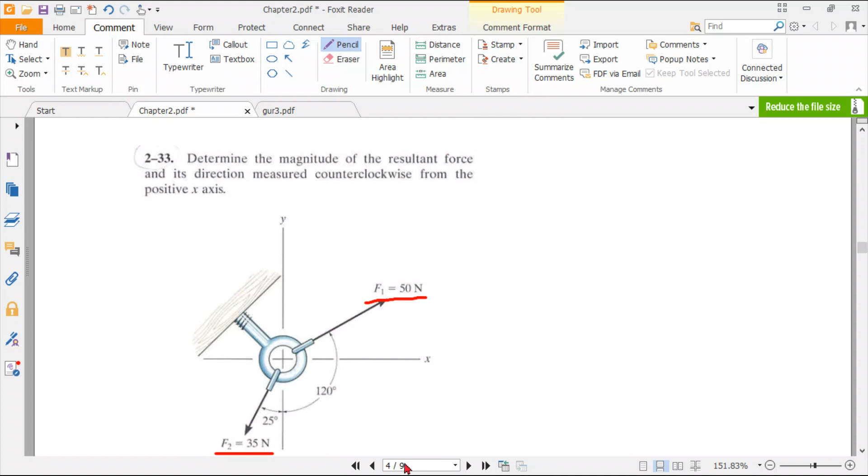We have F1 here, which is given as the magnitude is 50 newtons, and F2, the magnitude is 35 newtons. And the angle between F1 and F2 is given to us. It is given as 120 degrees. Okay, so let's see how we can solve the problem now.

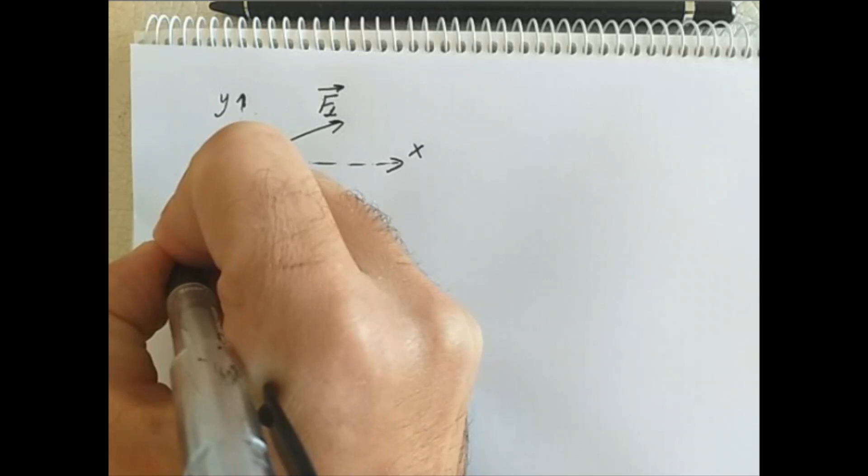Now, first thing is to draw the forces. Our axes are already given. So we have the x-axis as horizontal and y-axis as vertical axis. Now we are given two forces, F1, and there exists another force, F2. Of course, the angle between these two is given as 120 degrees.

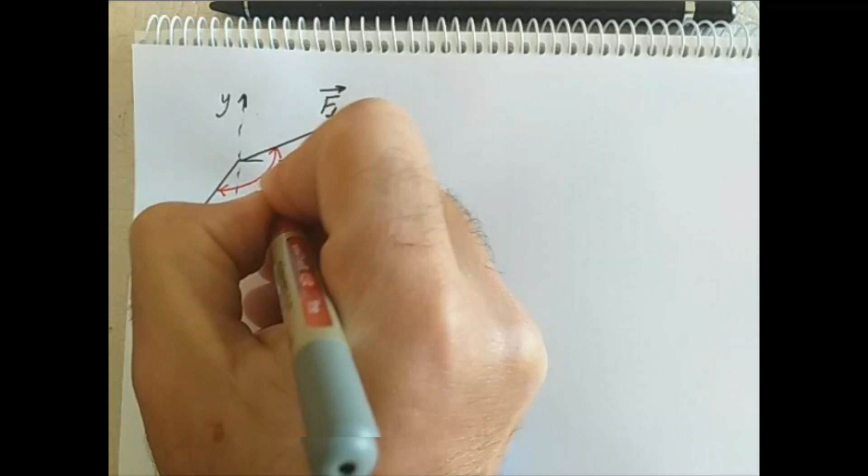Now we will find the components. First, let's write the x component of the forces. F1x is equal to 50 multiplied by this angle.

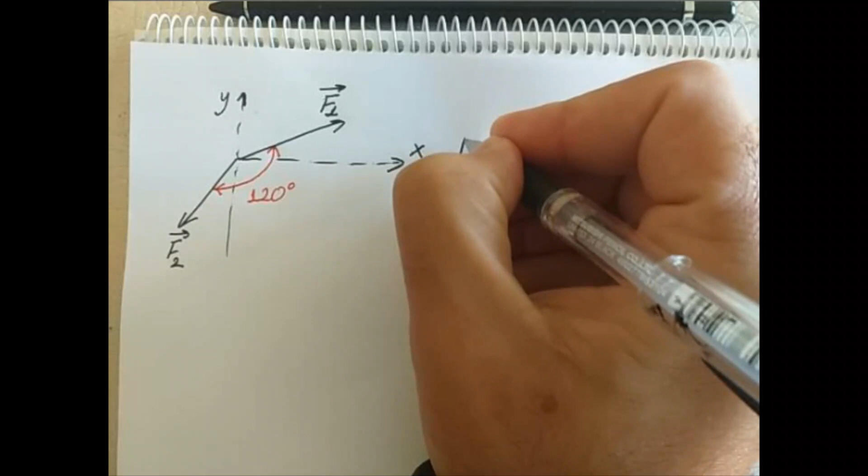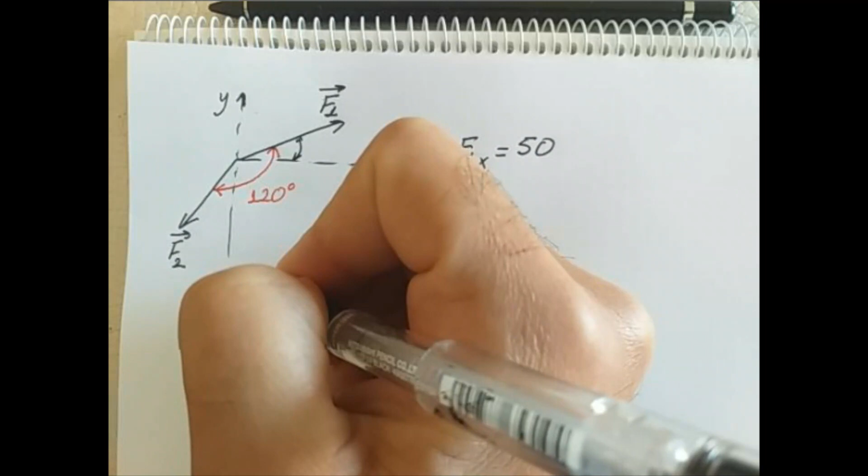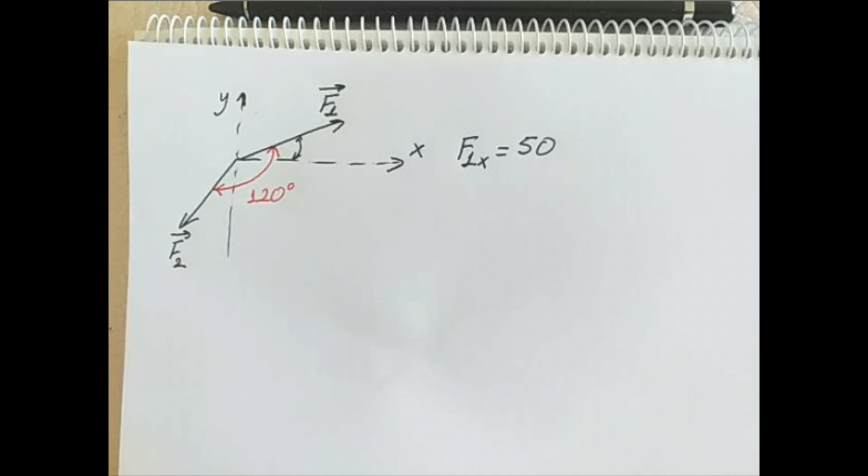Sorry for the moment. So this is just corrected. This angle is 120 and this angle is given as 25 degrees. So since this angle is 90 degrees, this angle is 30 degrees. This makes F1x 50 multiplied by cosine 30. From here we find 43.3 newtons.

Now let's find F1y. F1y is equal to 50 multiplied by sine 30, and it makes 25 newtons.

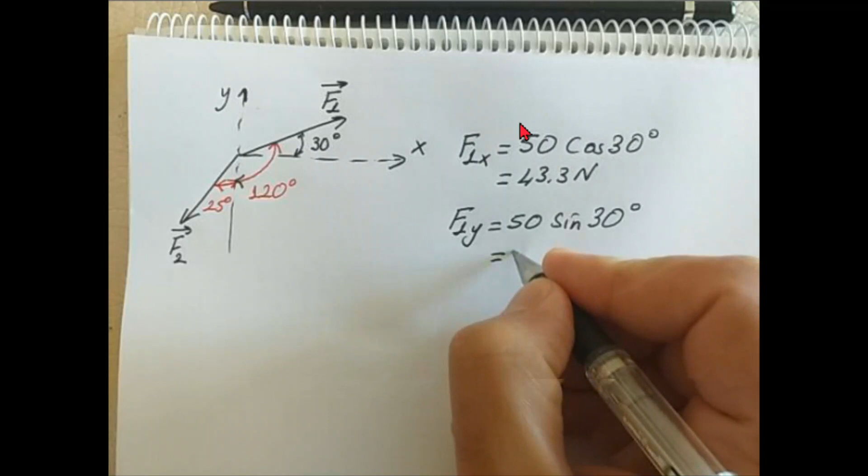Identically, we will find the x and y components of F2. Now F2x is equal to its magnitude, which is 35, but it's in the negative x direction, so minus 35 multiplied by sine 25, and this gives minus 14.8 newtons.

And F2y is equal to minus 35 multiplied by cosine 25, because it is also in the negative y direction. So the value that we get is minus 31.72 newtons.

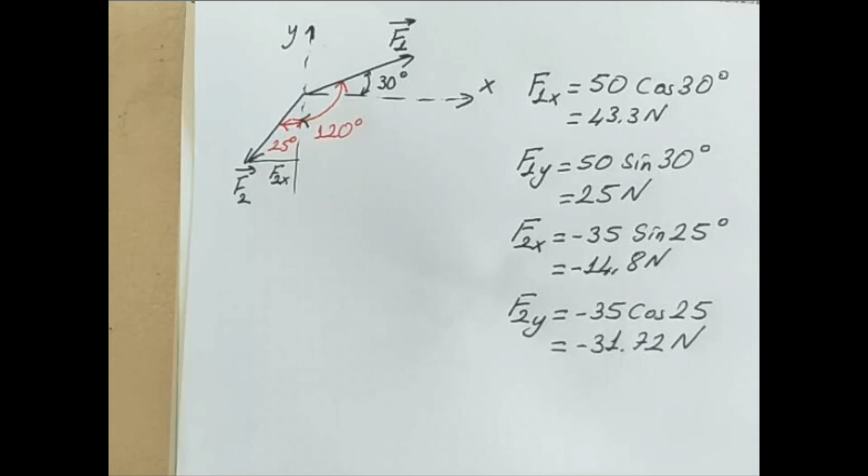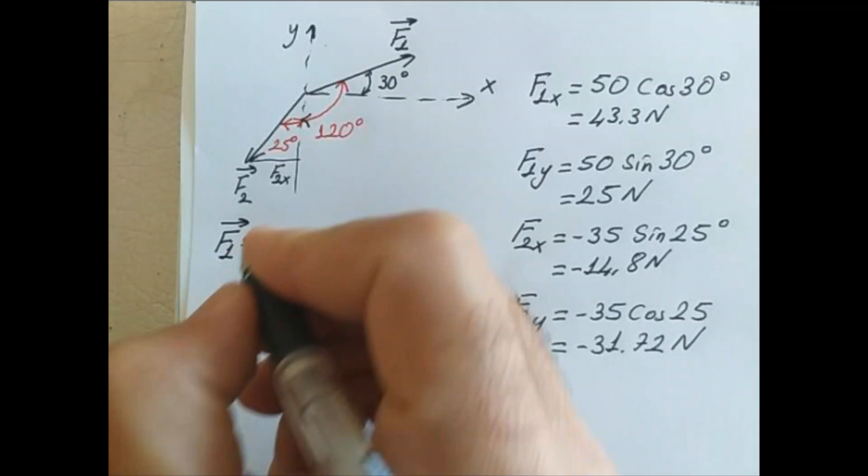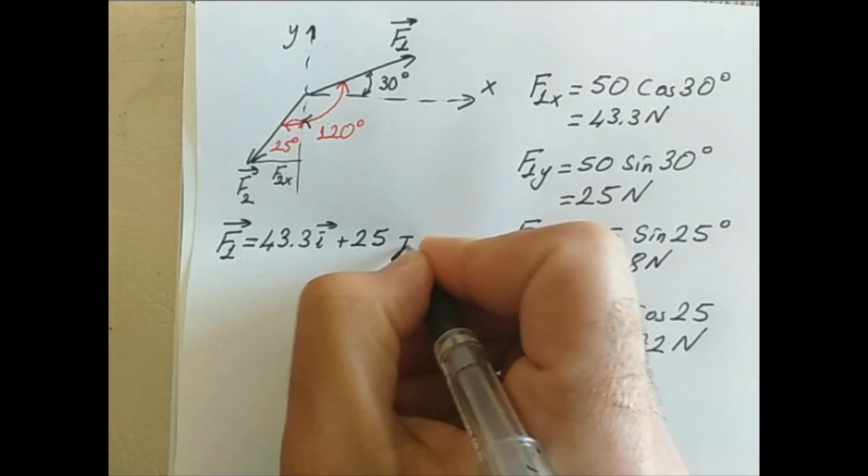Okay, now we can write the forces in Cartesian form. So F1 is equal to, by means of its components in x and y direction, 43.3 i plus 25 j, and F2 is equal to, sorry, let me write it again. F2 is equal to minus 14.8 i minus 31.72 j.

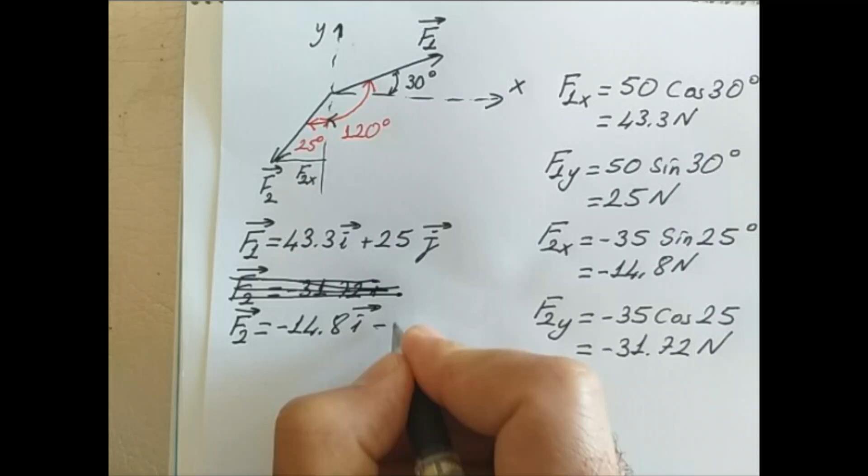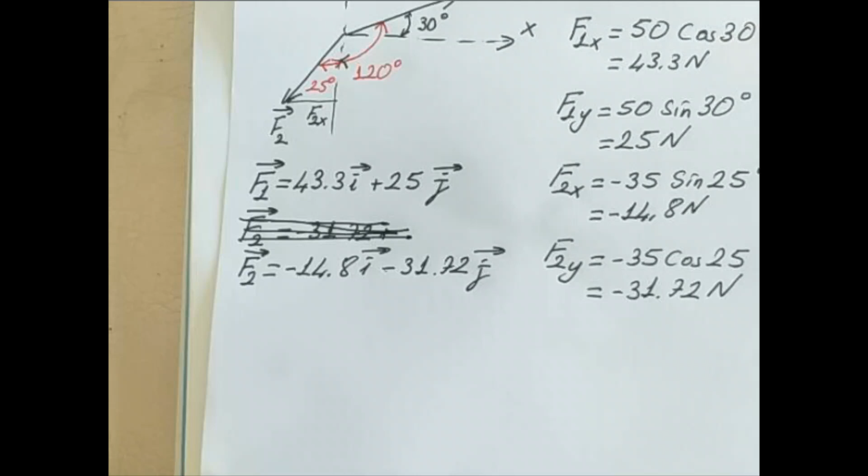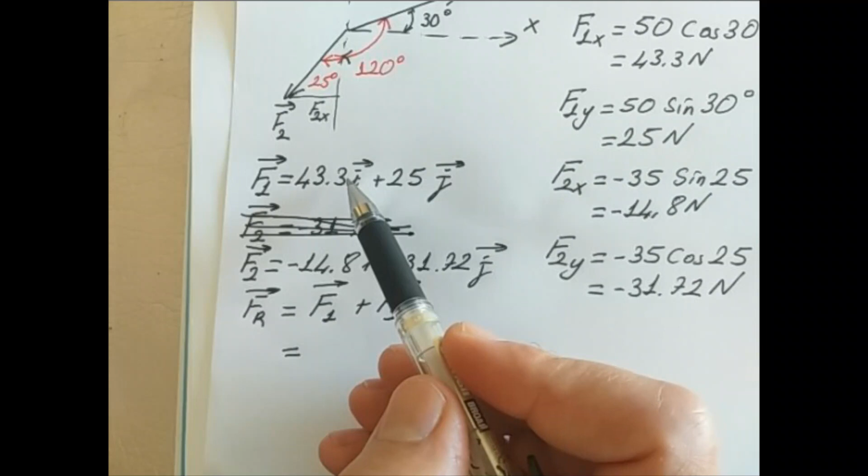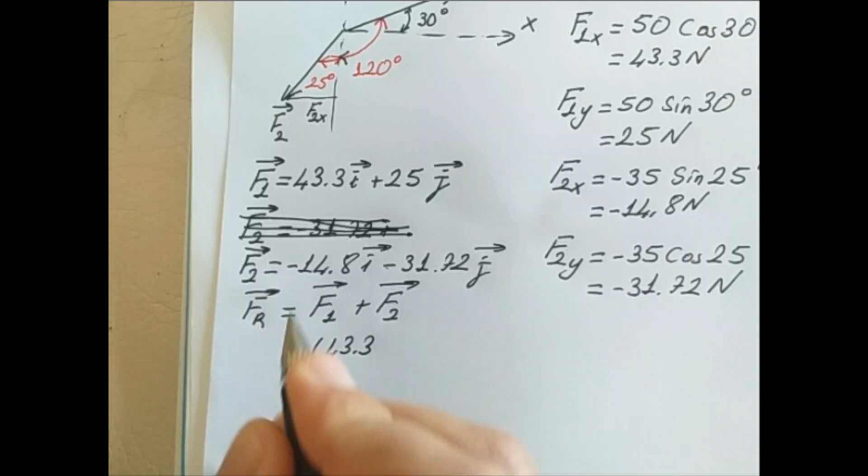Now the resultant force is equal to F1 plus F2. As a result, I will just sum up the x components first, so 43.3 minus 14.8 i, plus the y components, so 25 minus 31.72 j.

Now we can easily calculate the values. This gives us 28.5 i minus 6.72 j. So we have the x component of the resultant force and y component of the resultant force.

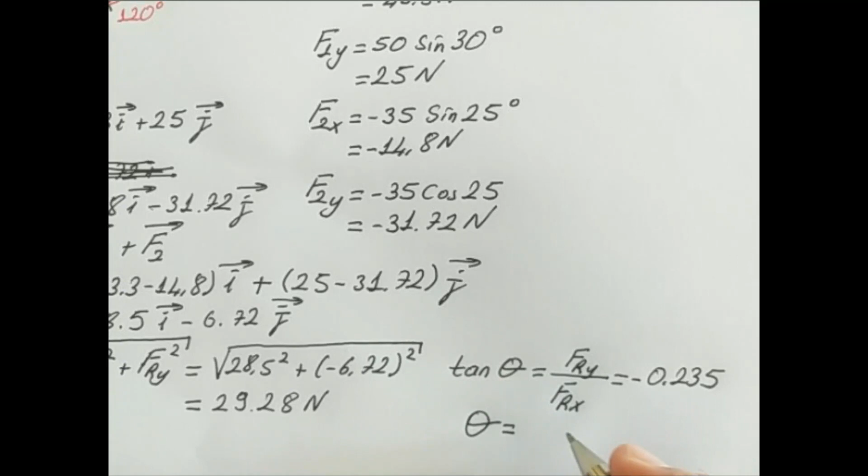Now I have to find the angle. So tangent theta is equal to FRy divided by FRx. Theta is the angle with respect to the x-axis. So this value is minus 0.235. And from here we can easily calculate theta. Theta is equal to 346.77 degrees.